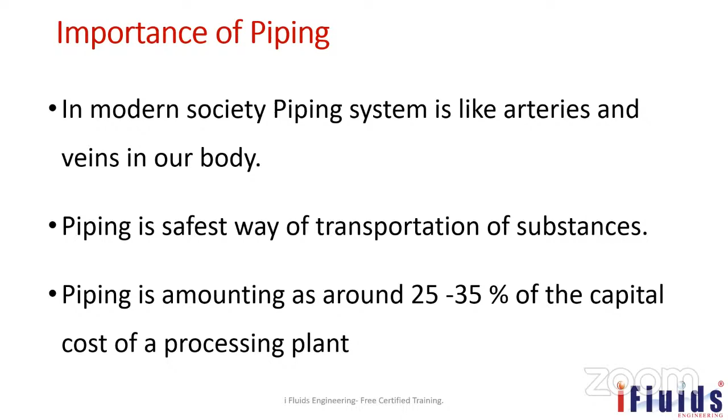Piping is like arteries and veins for any industry, important to transfer liquid from one place to another. This is a sample piping system, I just wanted to show a model. It has a suction valve, discharge valve, pressure gauge, everything, and then it's going to the discharge line.

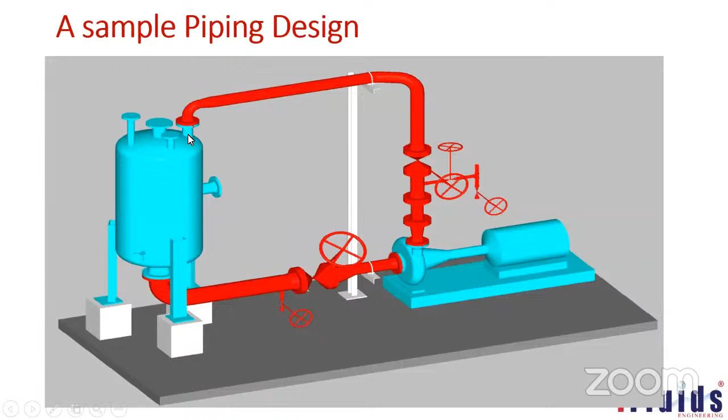We are going to see roles and responsibilities only, but before that I wanted to cover: pipelines have been used from ancient days to transport resources from one location to another. The fluid may be in any form - liquid, gas, vapor, or both mixed, or any suspended solids. The piping system is used to transfer from one place to another.

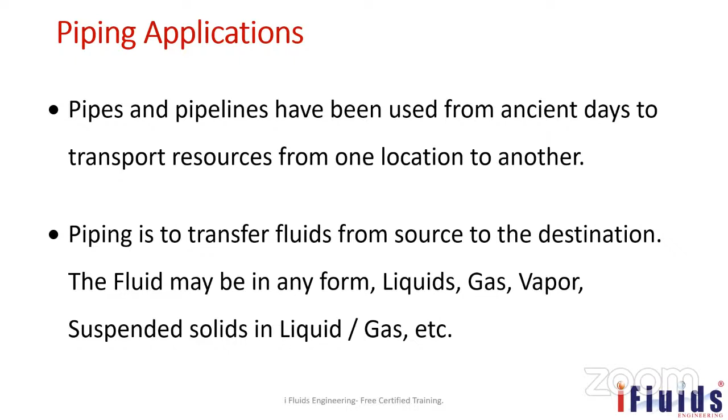Domestically in cities and households, piping serves to supply water, sanitization, waste disposal, cooking gas (that means NG), and firefighting. In chemical plants, paper mills, food processing plants, and other similar industries, piping is used as a way of transferring fluid from one place to other. Like in cement plants and PVC plants, it's used to transfer cement by pneumatic conveying.

Hope you all know about pneumatic conveying - to transfer solid substances from one place to other, we use this kind of pneumatic conveying system. You've seen tall buildings under construction where they use this kind of conveying system to move solid material like brick, cement, everything, to the top.

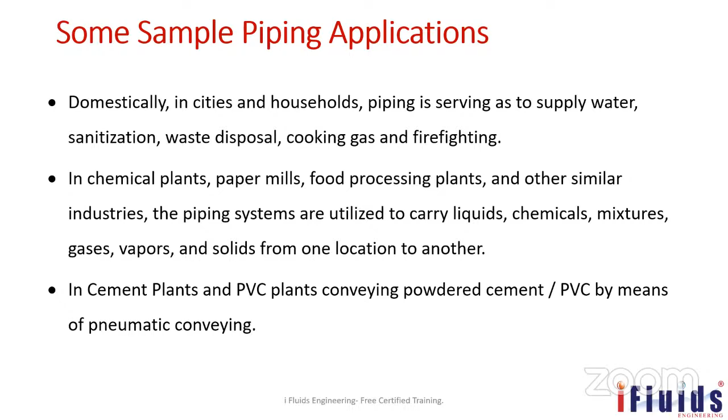Some pipelines in refineries carry crude oil from oil wells to tank farms, or from storage tanks to refinery units, or from tanks to refinery bottling units. These pipelines are used in these kind of areas. Natural gas transportation and distribution also convey natural gas from one source to other, from storage tanks to day tanks, or from day tanks to tankers - like that we use pipelines.

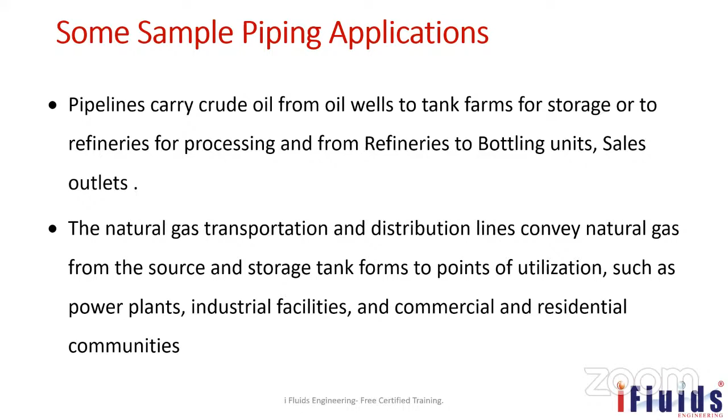Piping engineering is one of the most important groups in oil and gas, and in all industries like petrochemical, refinery, chemical, steel plant, pharma sectors, everywhere. The prime responsibility is engineering design, analysis, field execution, commissioning, troubleshooting, and all other aspects of the piping system. Design and analysis come under the piping engineer, while field execution, commissioning, and troubleshooting come under the commissioning engineer. So there are two sectors: commissioning engineer and piping engineer.

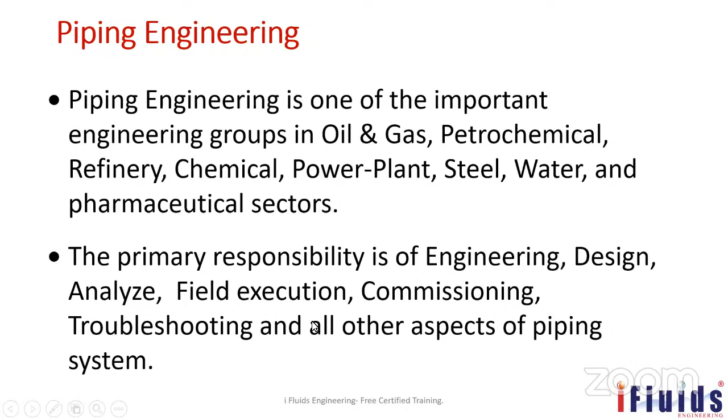Mostly we have to know about these commissioning jobs also, so that only then can you rectify issues, then only can you pre-plan. So now let's see what we have to do in designing.

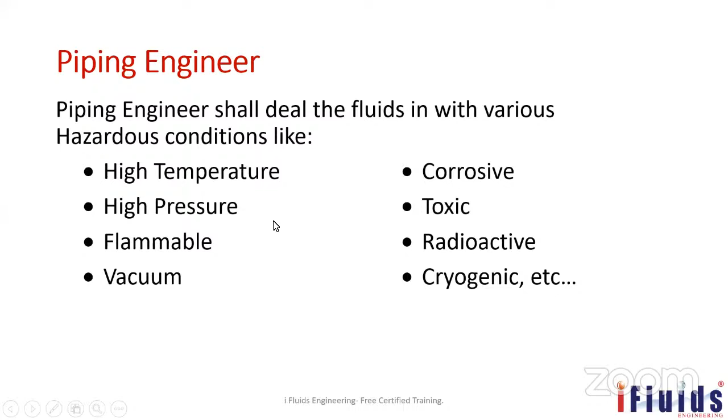Piping engineer, what has to deal with? He has to deal with high temperature, hazardous conditions, like fluid that may be high temperature, high pressure, flammable substance, vacuum, corrosive, toxic, radioactive, cryogenic, or any other form. The piping engineer has to deal with the fluids, and accordingly design the piping. This is the major role and responsibility of a piping engineer.

Preparation of a plant setup and layout according to the plot plan and available area, and then preparation of the equipment layout. Already we have seen about plot plan in our earlier training sessions. Second is preparation of equipment layout based on the P&ID and PFD. He has to choose which equipment should come where based on the P&ID, and discuss with other discipline members like process engineers.

He has to prepare the equipment layout, piping layout and placement, and piping material specification. Hope you all know about PMS. It is very important for any project at the initial stage, because this alone is going to decide the whole project. If you make any mistake here, it will cause huge cost or may lead to a big accident.

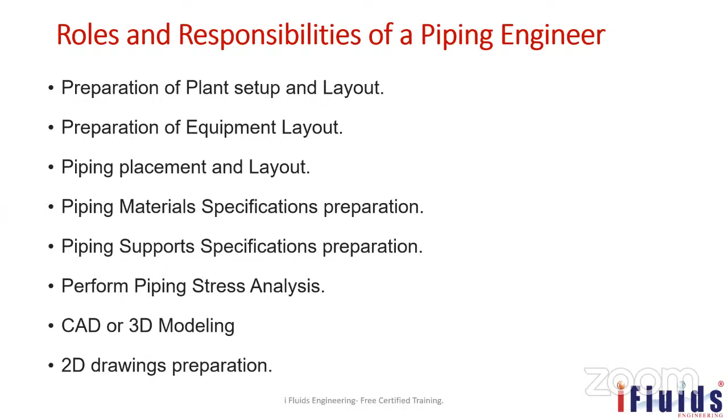So PMS is the main thing before proceeding for any project, particularly for piping engineers. And then piping supports and their specification preparation, performing piping stress analysis, CAD or 3D modeling he has to perform, and then from the 3D model he has to extract the 2D drawings, isometric drawings, for the fabrication of pipelines. These are all the major roles and responsibilities of a piping engineer.

Piping engineering category. This piping category has four major categories: plant and piping design, piping material engineering, pipe stress analysis, and piping construction. Construction comes under field engineer execution, who is going to execute it. Stress analysis is a part of a piping engineer's role. Plant and piping design and piping material engineering will be the main scope for any piping engineer.

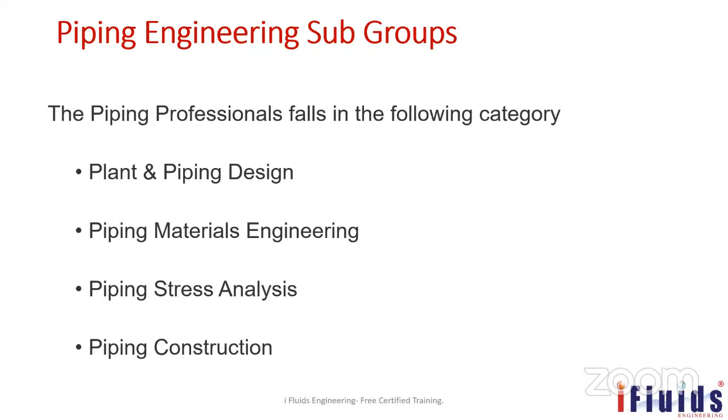So first we have seen plant and piping design. One by one we are going to see in detail. Plant layout designers optimize the facility or unit for a safe, efficient, and effective flow of work, taking care of cost, time, safety, environmental friendliness, and aesthetics. Piping design engineer designs the layout of a plant and location of any equipment.

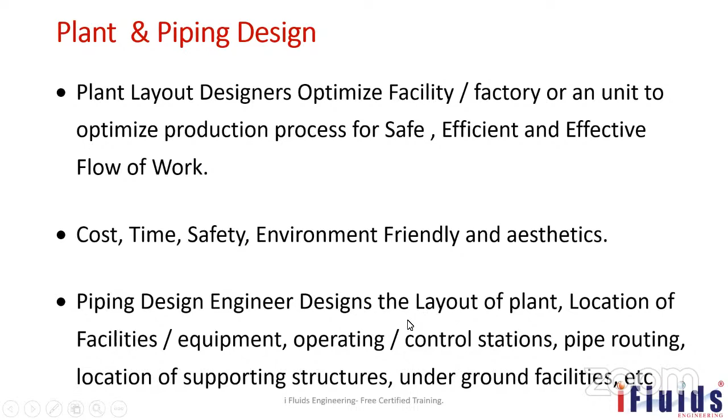As said earlier, he has to decide the location of any equipment according to the P&ID and PFD, and which process has to come next. As we will see in detail in upcoming slides. And then piping routing, location of supporting structure, and underground facilities - these are all things piping design has to take care of.

And then piping material engineering, creating the project piping classes. As I said earlier, in your industry, what we are going to build may have various types of fluids you are going to take care of - steam, corrosive liquid, oil, water, condensate, cooling water. For those kinds of fluids, initially we have to prepare the PMS.

So which valve we have to use, at what pressure range we have to use what kind of valves, in which service we have to use insulation up to what temperature, for which pipelines we have to use the painting code - all of this comes under the piping material specification.

So this alone decides the cost of the project, I mean the cost of the piping factor in a project, as well as the safety, and the early completion.

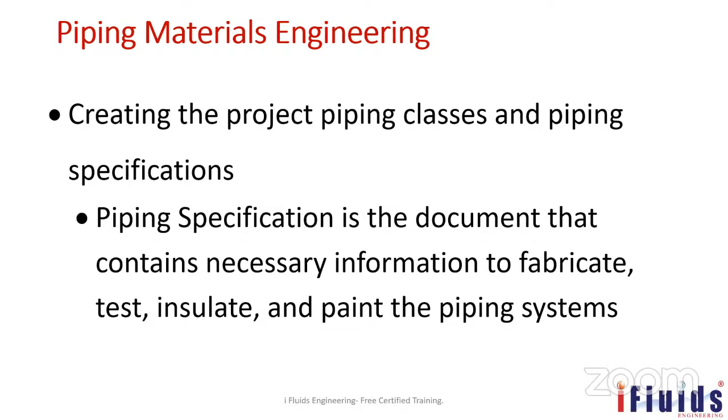A piping stress analysis engineer - I think you have already attended the training on piping stress analysis. It's a part of a piping engineer's role, not the main one. Some other person will take care of the piping stress analysis. It's a part of the project, but the piping engineer should know about pipe stress analysis, what they are doing and what will be the outcome.

He has to ensure the piping routing done by the piping designer considers the allowable applicable piping codes. He has to evaluate the piping flexibility and stress analysis, and measure the effects of support settlement, safety relief valves, seismic loads, and thermal effects.

Already we have seen thermal cyclic loads and wind loads, etc. The engineer has to take care of which support is suitable for which pipelines, at what size. If low bore pipelines, what kind of support; if big bore, what kind of support; if high temperature, if any thermal expansion loop is required, what kind of support is required - guide support, fixed support, shoe support, or some spring support - has to be identified through piping stress analysis for the critical pipelines.

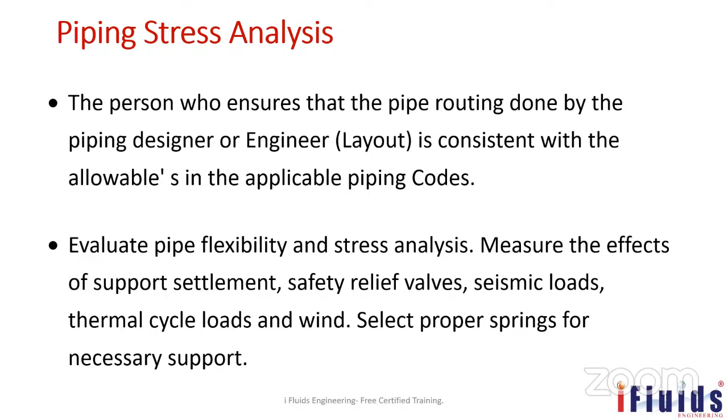Piping construction and commissioning engineer's roles and responsibility is to execute the piping as per the drawing, as per the P&ID, as per the piping layout with the isometric. He has to install the piping and supervise until commissioning is over, including testing - everything he has to take care of until commissioning the plant. He is the responsible one.

Why this point matters: some specialty chemicals in pharma industries or other chemical industries cannot follow standard piping design because their fluid will be different from standard petrochemical or power plant fluids like steam. Steam will be the same everywhere, so those codes and standards are applicable for steam anywhere, power plant or refinery. Same with crude oil - it is same everywhere, all throughout the world. But some specialty chemicals we have to take care of according to owner requirements.

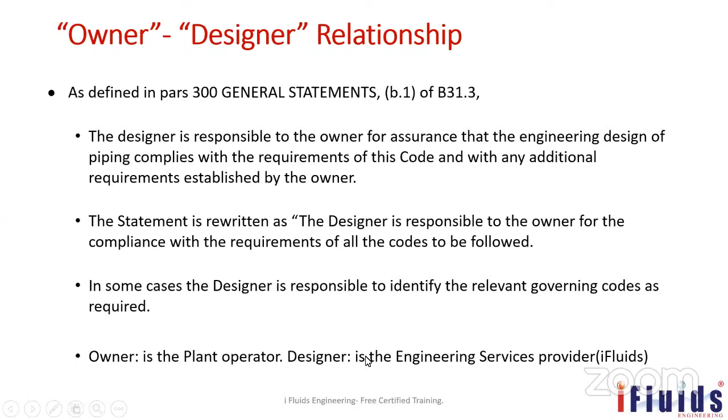What does the code say? The code specifies engineering requirements regarding safe design, construction, operation, and maintenance of pressure piping. The code is not a design handbook. Many decisions that must be made to produce a safe piping installation to maintain integrity are not specified in detail within this code - there are guidelines only, we cannot go fully as per the design. Based on safety aspects, based on specialty chemicals, you have to follow those kinds of codes.

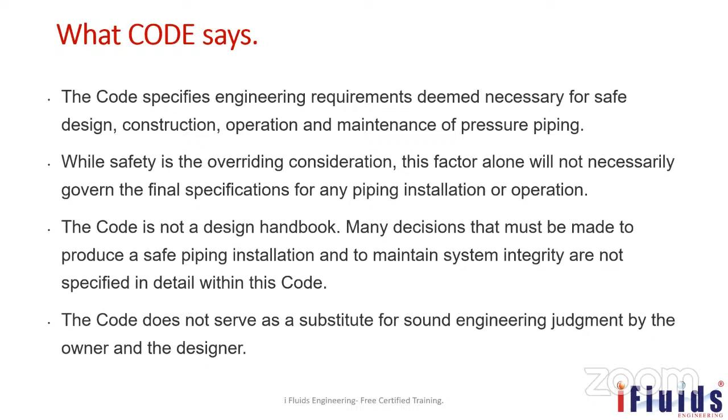Piping design: the basic concept is to safely and economically transport fluids from one place to another without considerable pressure loss. The piping associated with the plant or facility can be divided into two categories: ISBL and OSBL. ISBL means inside boundary limit, OSBL means outside boundary limit. Whatever the processing unit is, that boundary is called the boundary limit. Raw material storage, final storage, or wherever we get chemicals from other industries through pipelines, and the utilities, comes under OSBL - outside boundary limit.

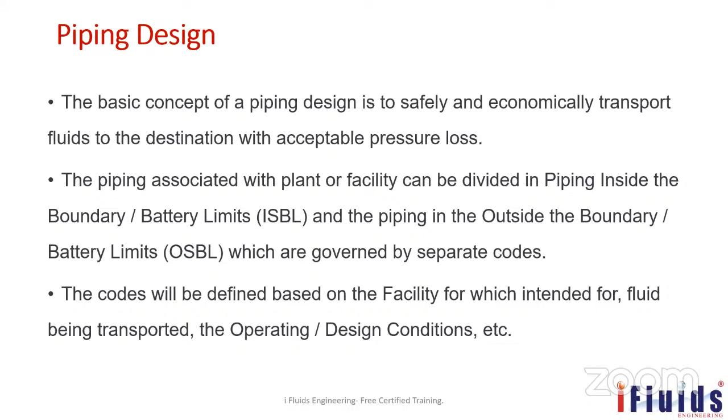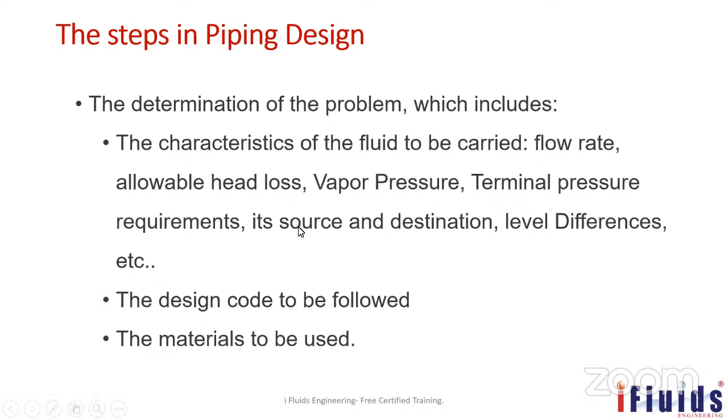The steps in piping designing are the characteristics of the fluid to be carried: flow rate, allowable head loss, vapor pressure, terminal pressure, level difference - these all have to be considered, then the design code to be followed, and the material of construction (MOC) to be followed. Determination of the preliminary pipe route is based on the plot plan and the P&ID. So the piping route, line length, static head difference - these all have to be considered before designing any piping. Then pipe diameter is based on the allowable head loss. That all comes under pipeline in-depth design engineering.

Already we have seen stress and flexibility analysis, code compliance, support design - that is anchor support - or based on the analysis you have to choose the support.

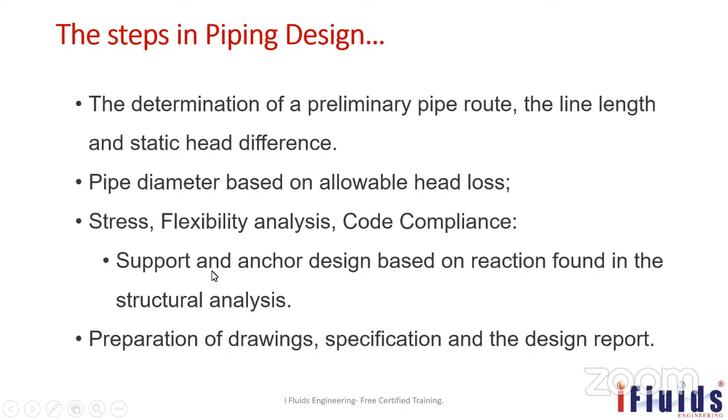And then preparation of drawings, specification, and a design report. These are all the preliminary steps in the piping design engineering.

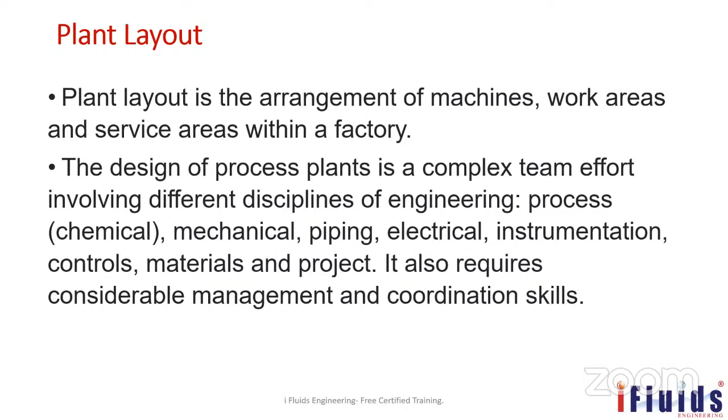A plant layout, we have already seen this one. Plant layout is the design of a process plant in any complex within the plot plan. We have to design how the process will be, how the mechanical piping, electrical routing, instrumentation routing, electrical cable trays, instrument cable trays, and earthing layout will be. So all those come under the plant layout, and all of that has to be considered while constructing any piping layout.

The objective is to design and construct a plant in a cost effective manner. So our major role is to construct a plant in a cost effective manner by minimizing the design, engineering, and construction schedules and getting the plant on stream as quickly as possible.

That is, you have to design the plant in a standard way to make its construction short term. So every owner will look at the payback period, how much they are investing and within how many years they are going to get back the investment amount through the plant. So your construction should not take too long, though it also depends upon the construction party who builds it.

At the same time, it is the piping engineer's role also to make the plant compact. So wherever possible, symmetrical design we have to follow, similar kind of set design, so that the fabrication will be easy and the installation will be easy.

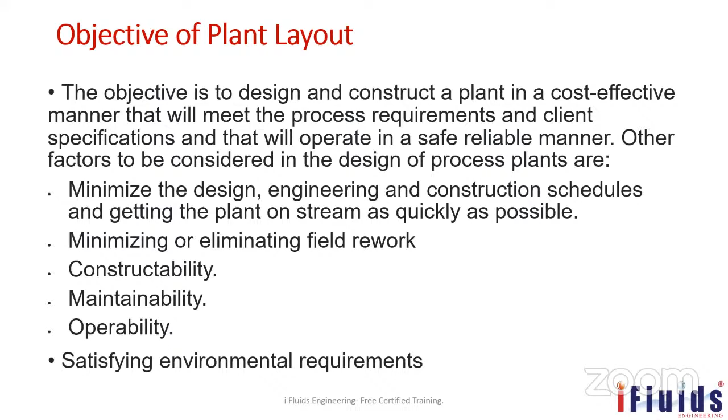Operability, that is already explained - the pump equipment to equipment distance we have to maintain, and satisfying the environmental conditions, that professional ethics we have to maintain.

There are two types of project facilities, majorly we divide in industries. The first one is a greenfield project, the second one is a brownfield project. As the name itself implies, greenfield means we have to start from scratch, like there will be a fresh land, and we have to start from there.

Piling to production. Brownfield, on the other hand, is where an operating plant already exists, and adjacent to that or nearby, they are going to build another plant like an extension, another kind of project. They will go for an extension project. This kind of project is called a brownfield project. So we are going to see this in detail.

Brownfield project is a project executed wherein the existing facility or existing plant will be running. Adjacent to that, we are going to put another plant - that is called brownfield.

The site is already developed with the required infrastructure. That means road and getting approval from government, statutory requirements, manpower and resources, utilities, power, water - those kind of things already will be available. That is called infrastructure available nearby the brownfield.

From that point, we need to develop a new extension. The projects of new expansion, revamp projects, yield improvement, etc. come under the brownfield project.

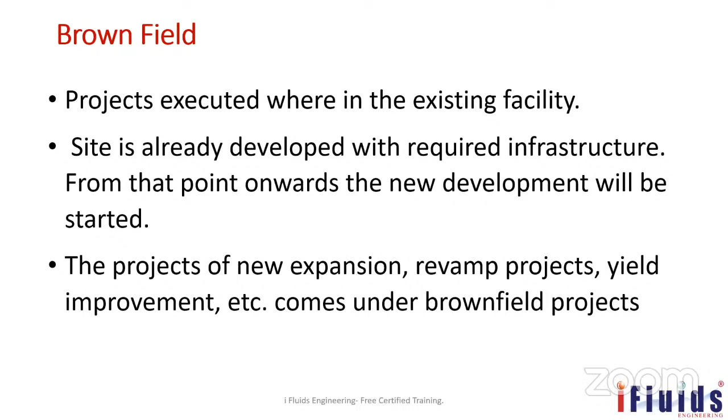We no need to worry much, whereas in greenfield projects you have to take care of those kind of things yourself. Okay, in greenfield projects, what are all the advantages?

What are the disadvantages? Accommodation could be difficult because it is far away from the managed area, so there will be accommodation issues. People cannot stay there because there will not be any resources or utilities - power is not available. So it must be built beforehand.

Limited local suppliers in undeveloped location - if this is a remote area, there will not be much resource for us to get any items, I mean for the plant construction purpose.

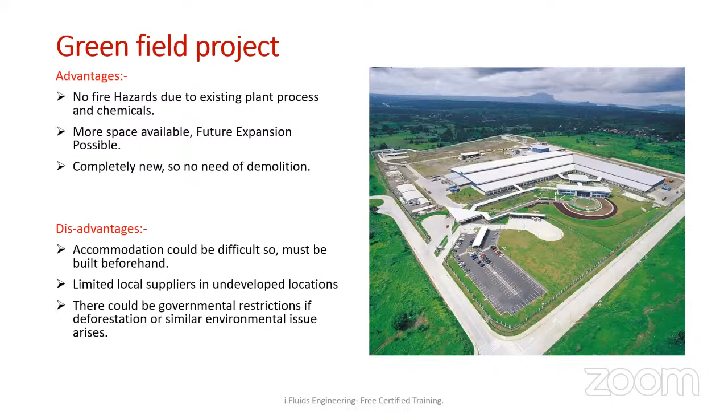There could be governmental restrictions if deforestation or similar environmental issues arise, because for putting any new plant we have to do deforestation. It may require approval from government local bodies, which may take a lot of time.

Whereas in brownfield projects, the advantage is codes and standards are already available. That means the existing plant's code standards, PMS they have followed, philosophy they have followed - we can take that. And the utilities are readily available at site, like water, power, vehicles, everything will be available.

If you need any crane, the existing plant will have it available - you can use that one. Whereas in greenfield project, you have to rent a crane or buy a crane separately. So those kind of things as well as vehicles.

Infrastructure is well established - that means you need more manpower, but already manpower is available here, whatever the resources. You can imagine you are building a new home on fresh land versus building your new home near your parents' home. So what will be the difficulty? You can assume.

Disadvantage is fire hazard risk is very high. That is one disadvantage because nearby, if it is a petrochemical plant or refinery plant, you have to barricade this area where whatever the plant extension is going to come. There will be a large, more probability for fire hazards. So that things you have to be very careful.

Limited space, difficult in further future development. Even finding the required plot size could be difficult because if it is a brownfield project, there will be limited space only available. There we have to accommodate all the equipments. So those kind of things will be difficult in a brownfield project.

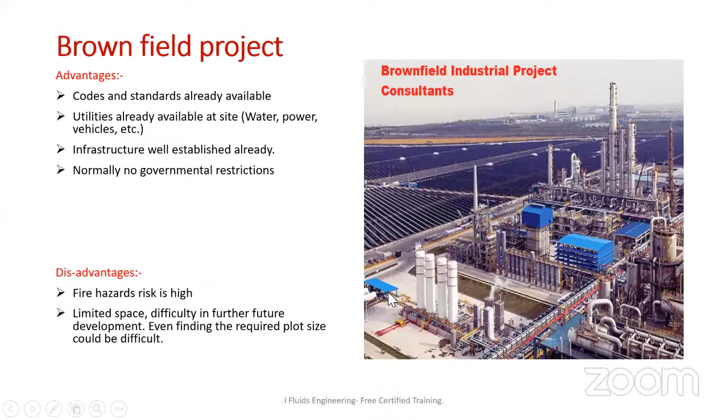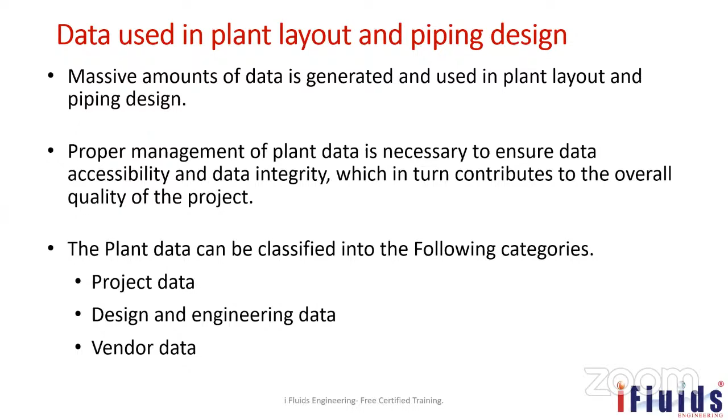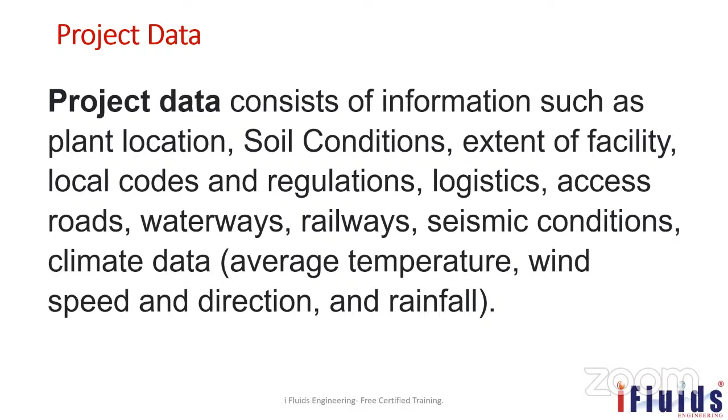Project data is nothing but information such as plant location, soil condition - if soil condition is good or not we don't know, we have to do soil investigation - and then extent of facility, local codes and regulation, logistics, access to the roads, because if any main road is nearby we have to connect to that road. So for that we have to make a road, waterways, whether any harbor is nearby or not, railways is there or not, wind load, seismic condition. These are all the data required for the plant design. This all comes under the project data.

Design and engineering data is internally generated during the design and engineering phase of the project. For example, according to the service, equipment sizes, service condition, pressure of the fluid, temperature of the fluid, corrosive nature of the fluid, mass flow rate - these are all the required data for design and engineering purpose.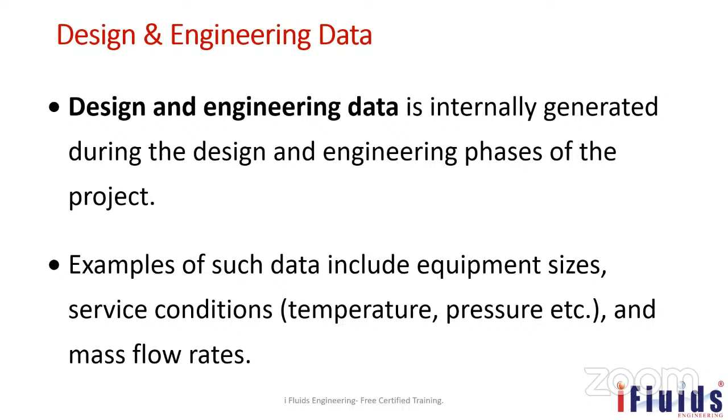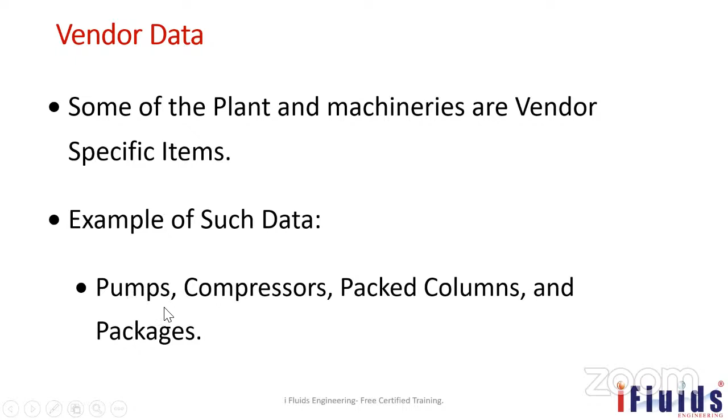Vendor data is for ready-made equipments like pumps, compressor, boilers, cooling towers, columns. These and any other machineries we have to get from the third party, that means vendor, as per our requirement only. But those kind of data should be available with us to proceed with the plant and to design the plant.

What are the skills required for a piping designer, piping engineer? He or she should have analytical skills, project management skills, written and verbal communication skills, observation, and drafting skills.

And then common sense and attention to details, ability to think creatively, to solve layout problems and challenges, because some areas we may have constraints, space constraints will be there. There, how do we have to lay the pipelines? So those kind of things we have to face while designing any piping layout or piping.

Ability to think and visualize spatial relationship between plant items in 3 dimensions. Effectively use computer aided tools like 3D modeling, which we already saw, and stress analysis software, and be able to coordinate with the other disciplines and know the basic things in the other disciplines. Then only we can do the plant, piping or equipment layout.

Because for any instrument, how the thermocouple will be, how the motor will be running, where they will take the power cable, for that switch box where we have to provide the support - those kind of things, where they will provide the support, you have to keep in mind.

So while designing any pipe or equipment layout, it's not only the mechanical thing, also the instrument. If any piping you are taking out there, above this one instrument rack will be there, above that one electrical rack will be there. So those kind of things you have to keep in mind when designing a pipe rack. Not only do we see about the mechanical piping, also the other disciplines.

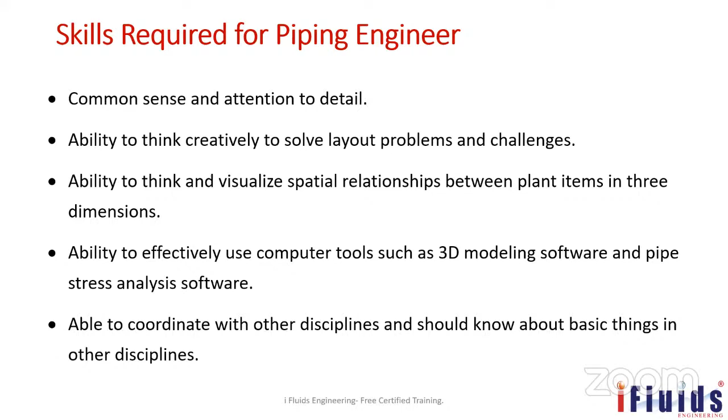Because if a mechanical, there will be one major problem. As a mechanical engineer, I faced many issues because if you take instrument engineer, they will do their part only, instrumentation only. If electrical engineer, they will take care of only electrical only. They will not think about the other discipline. But as a mechanical engineer, next to process, we are the major, we are holding the major responsibility.

Because we have to take care not only of our mechanical pipings, we also have to take care of the structural things, and we have to take care of the safety things, because there will not be any separate person for safety equipment or safety related item executions. We are the ones who are going to do the piping design, piping layout for the fire water pipelines also. So those kind of things are additional jobs for us.

And then for the cable rack or the instrument rack, they will not prepare the support on their own. We have to provide the support for instrument and electrical. So our job is double the time of the other discipline's job. So mechanical is 60%. If it comes to execution, commissioning, 60 to 70% of jobs are in our hand only.

Our ability is to function effectively as a member of any multidisciplinary project team, and to effectively communicate and resolve layout issues with project management. When a project manager sets up a team, they choose people from different disciplines - safety, process, mechanical, civil, instrument, electrical. While designing, up to preparing the P&ID, only the process person will be the lead in the project team.

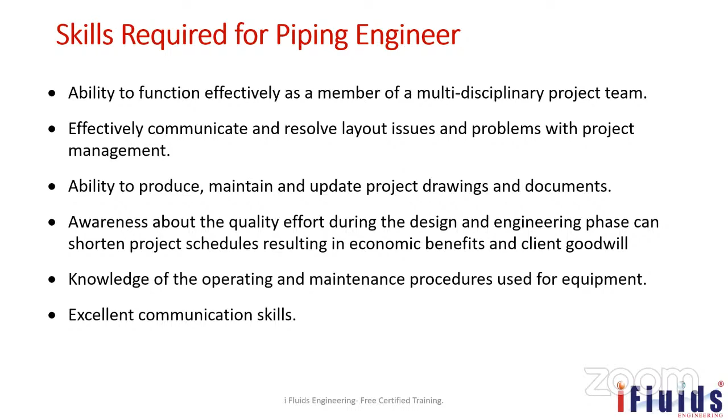Excellent communication skills are needed, along with sufficient knowledge of the process being used, including the function of each equipment. For example, a process person may mention that a slope is required. You have to be very clear on why the slope is required - what kind of chemical they are using, and that's why we need the slope. Accordingly, we have to design the piping.

You also need a basic understanding of the process - what they are going to produce, what is the raw material, what is the major process, what is the outcome of the plant or product. You don't need to go in depth into heat and mass flow rates, but you should know what is coming from the feed, and for each equipment outlet, how the property is changing - from liquid to vapor or vapor to liquid - and why it is changing.

Do not just follow the P&ID and equipment GA drawings blindly. I mention this because there can be mistakes in the P&ID, and mistakes in the equipment GA drawings too, since the GA drawing is prepared by the vendor while the P&ID is prepared by our project team. In the P&ID they may mention that a pipeline has to connect to nozzle 1, but in the GA, that communication may not have been properly conveyed to the vendor, so they may choose N1 as nozzle 2 instead.

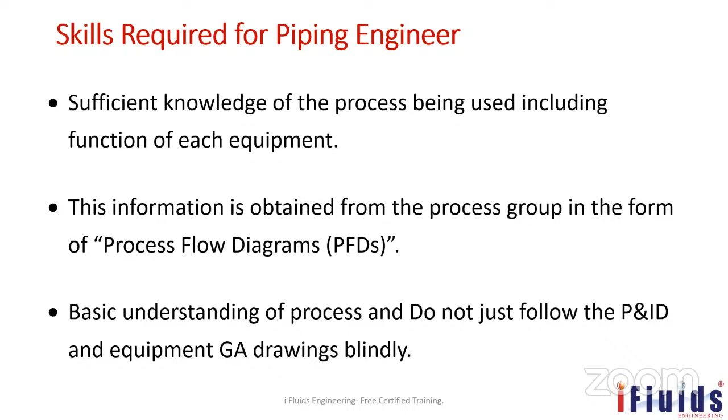There is no thumb rule for piping design or piping execution, but there is a set of rules. The approach to plant layout and piping design can vary depending on the nature of the plant and project. For example, the design philosophy for offshore facilities completely differs from onshore chemical plants because of the limited space available on offshore platforms. According to the process requirement and where the plant is located, our mindset should be prepared accordingly. As everybody knows, offshore is like an oil well platform located in the sea.

Not in the middle of the sea, but in the sea where there is an island - those kinds of things come under offshore. Things like our power plants and chemical processing units located on land come under onshore. There will be a lot of differences in all systems - flaring, piping, and safety systems. There will be a lot of difference.

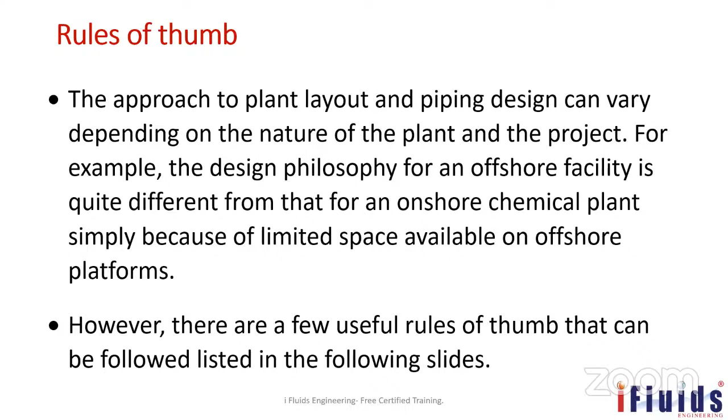However, there are a few useful rules of thumb available while designing the piping layout or piping design. Knowledge and understanding of project requirements and project documents, consideration of space and resources, arrangement of equipment in a neat, organized manner, taking into account process needs and safety.

Neat and organized manner means the plant, not only piping design, but the overall look should be very neat. A plant while anybody is seeing should be neat and organized, because in some plants we may have train 1, train 2, and the same process happening here will also be happening in train 2. So we have to design the plant identically, so that it will be easy for piping execution, checking the drawing, commissioning, testing, and even for operation it will be easier for the future operating persons. So those kinds of things you have to keep in mind.

Attention to detail, including adjacent equipment, supports and other items which can cause potential clashes between piping and equipment supports. So if it is a flammable hydrocarbon line you are laying in a pipe rack, the fire water hydrant line should be away from the flammable lines. If it is not possible to take it underground, it may require another pipe rack, or the same pipe rack. You have to put flammable pipelines at one corner and the fire hydrant line on the other corner, because if any fire happens, the fire hydrant line should not get affected, so that we can extinguish the fire. So those kinds of things you have to keep in mind.

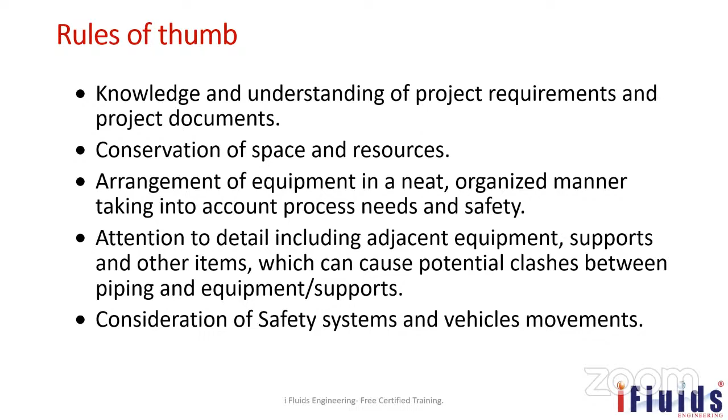The same thing applies inside the plant also, not only in the pipe rack - inside the plant also, the cooling water line should not touch the hot service line, because it may take the temperature from that, and then there is no meaning in using cooling water.

That also we have to keep in mind, because wherever we are taking any steam or utility lines, we have to keep one tapping point for future purposes with the isolation valve and blind arrangement. We may not know in future whether the owner is going to extend the plant or not - he may set up a new plant. So at that time, again piping, routing and all is not required; we can take from this valve tapping. So based on that we have to design.

Even though the owner may not know, we have to suggest it's better to keep a tapping point here, because in future it may be required for safety purposes also. This pump may require a diesel engine, and the cable should go underground, so that in case of any major fire incident, your fire water pump will be running. So those kinds of things plant people, process people, safety people know, but from our point of view also we have to keep safety in mind - as far as possible, fire hydrant pipelines should be taken underground.

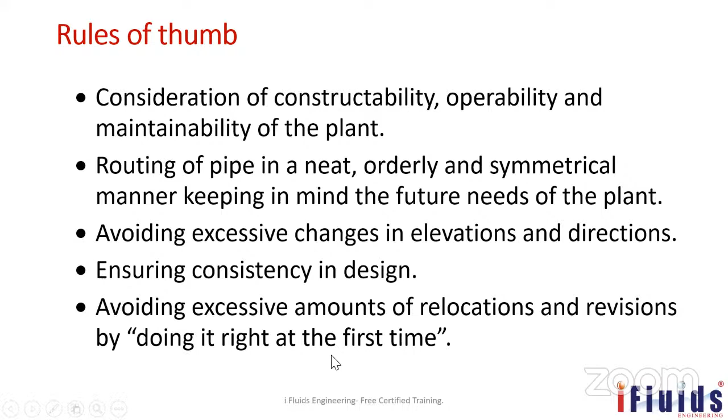Avoiding excessive changes in elevation and direction which cause piping issues, and ensuring consistency in design, avoiding excessive amounts of relocation and revisions by doing it right the first time. It may not always be possible, but over the period of experience, or by doing mistakes, we can learn from the mistakes and do it right the first time.

So that's all from today's session, because we don't have any particular topic today. These are all the piping roles and responsibilities of a piping engineer. So if there are any questions, we can go for a question and answer session. We can start.